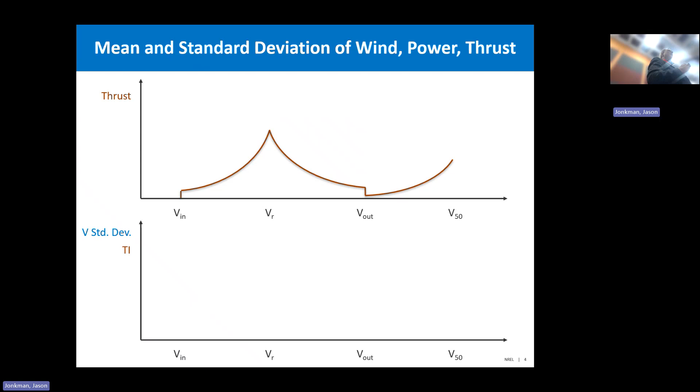So my question next is, thrust is going down. Why do we have to shut down the turbine at high winds? Just let it ride through. Thrust is actually lower. So why do we actually shut down? What's driving that? Anyone? Why shut down on high winds? Any idea why you do that? Yeah, please.

Yeah, it's all about stochastics. It's all about turbulence. And so maybe my next question is, if you look at standard deviation of the wind speed, so fatigue is really what's driving the shutdown, or turbulence intensity, what do those curves look like? If I go to higher wind speeds, is my standard deviation going up or going down? Is my TI going up or going down? At least at a typical site. What do those look like? Any ideas? And if you've downloaded the slides, you probably already see it.

But let's look at standard deviation. Is that going to go up or down with mean wind speed? Please. Perfect. I completely agree with that answer. So this is at least how the IEC will say the typical site goes. The standard deviation of your wind speed is going to go up, and your TI is going to go down, because the TI is the standard deviation divided by the wind speed, and the denominator is going up a little bit faster. And so this is really what's driving it.

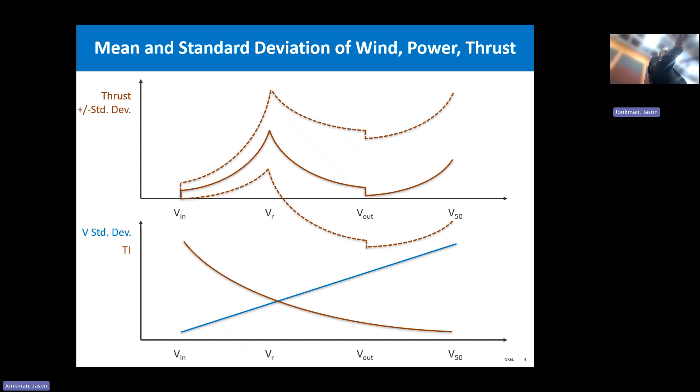If you look at the range, basically add the standard deviation to that load, it looks something like this. Maybe it's a factor of 2 above the mean at rated. Of course, it spreads out as your standard deviation is going up. The load is going to get worse, and eventually fatigue is just going to hit you at the high wind speed. So that's why you shut down. Whether the peak of the load is at rated, cut-out, or the 50-year extreme probably depends on the turbine. I drew it the way it commonly is, but that hopefully gives you some basis of what you're expecting in the different operations of the turbine.

Okay, next fundamental concept. You have to understand this or you can't get anywhere. So, mass-spring-damper system. I have a mass M, spring K, dashpot C, and applied force F. What's the equation of motion for this system, in terms of those variables? Anyone? Equation of motion for that system?

Perfect, I think that's what you said. So I could think of this as a very simplified turbine, right? Maybe that's my tower mode, and the nacelle has big mass, they have the rotor on top, and I have some spring damper representing the tower. And so there's the equation of motion.

So now my question for this system, very simple system—I think you all studied it in undergrad—what's the difference in this system between a resonance and instability? How would I make this system in resonance, and how would I make that system unstable? First of all, resonance—what would drive that system into resonance? What does that look like? There's some characterization of that system to make a resonance. What would that be?

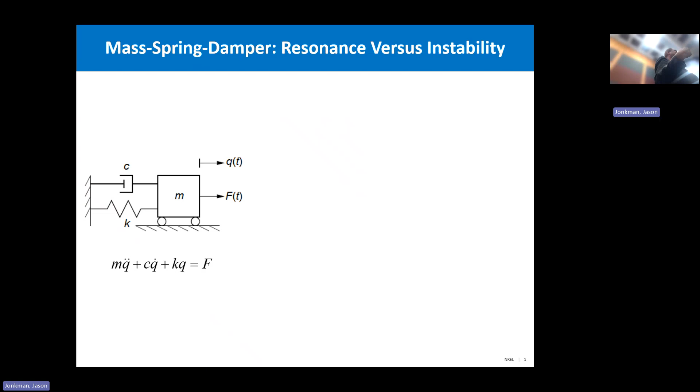I'll try again—like the force you apply. So I take my force and say that's some cosine or sine of omega. And if that omega lands right on the natural frequency, that square root of k over m you mentioned, I can get resonance. And the thing with resonance is that it basically grows linearly. It depends on damping, but it will grow linearly. So that's bad—not terrible, because hopefully you realize that and shift away, but it's bad.

Now, what would instability look like? How can I make that mass spring damper system unstable?

Yes, you change a sign. Typically it's in the damping. So great, I agree—so if I take my damping and say that's a negative value, what you really get is an exponential growth. So it's not linear anymore, now it's exponential. And eventually that's either going to destroy the system altogether, it's going to blow up, or maybe you'll hit some nonlinear limit cycle oscillation.

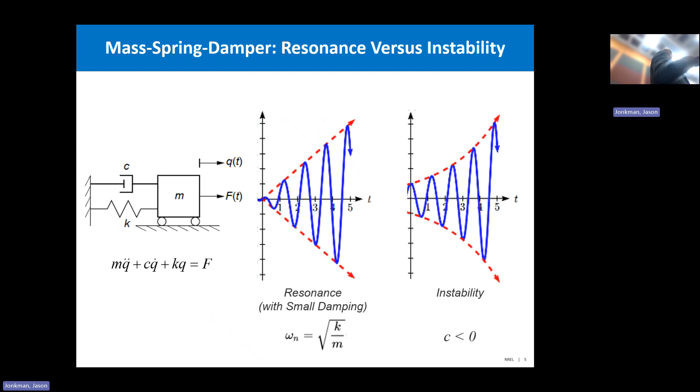But that's bad. And a big part of loads analysis for wind turbines is about this—where's my resonance, and that's usually about what frequencies of excitation are coming in. I don't want to dwell on that for long. So I want to avoid resonance, and I absolutely want to avoid instability—that's really bad. Usually instabilities happen through some aerodynamic interaction. That damping can become negative through aerodynamics, so we have to be very careful with those things.

Finally, the last fundamental concept that's really important is that resonances are bad—so how would you get resonance in a turbine? What you see is that a turbine operates in a turbulent atmosphere, and the rotor basically samples this turbulence. If you imagine just a linear shear, my blade's going to cut through that, and that blade's going to feel basically a 1-per-rev cycle because of shear.

I think of turbulence like a Fourier series—I have the linear term, the quadratic term, the cubic term, and so on. It's really kind of sampling that nasty field, and what that does is sample the turbulence. So the blade is going to see excitation at 1p, 2p, 3p, and so on, all the harmonics of the RPM. Of course the energy in that wind decays with frequency, so the lower frequencies may be higher than the higher frequencies, but nevertheless, it's going to sample that.

If you take that 3-bladed rotor and put it on a tower, you're going to see something very different in the tower, the drivetrain, the nacelle. You're going to see basically a sampling of 3p, 6p, 9p, because it's feeling the effect of the rotor. So these are the frequencies that are extremely important for the blades and the support structure.

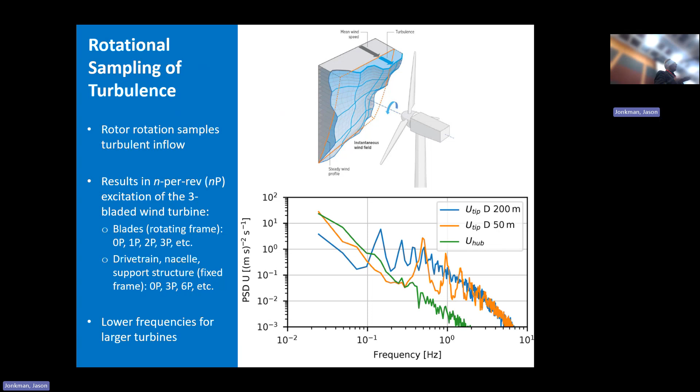So any questions on that? That's sort of fundamental concepts, and we'll use them all, I think, throughout the day—but fundamental things. Any questions on that? Makes sense, hopefully it's not too new.

Okay, you want to say something? I was just going to say, in your case, the force was only a function of time, right? Was it also a function of Q and Q dots? Yes, with instability, yes definitely—the force comes from the wind, it can be unstable as well. Yeah, so very much that's true in the aeroelastic sense, right? Because the aerodynamic force is not just a function of time; it's going to depend on the motion, both displacement and velocity, maybe even acceleration. So it's all there—great point.

So there's some fundamentals of that you need to understand for wind. Next thing, design principles of wind—maybe just jump through this here. So really, I think it's this coupling that really drives loads analysis for wind turbines.

So of course, we got the aerodynamic load that hits the rotor. As Emmanuel was saying, it's an interactive effect between the rotor and the wind. There's structural analysis, since these things are large and flexible. Most of these systems now are the size of buildings, skyscrapers. So there's lots of modes that can get excited, and natural frequencies, not just one. In mass spring damper systems, there's a range of natural frequencies, and you always have to worry about resonance of those things.

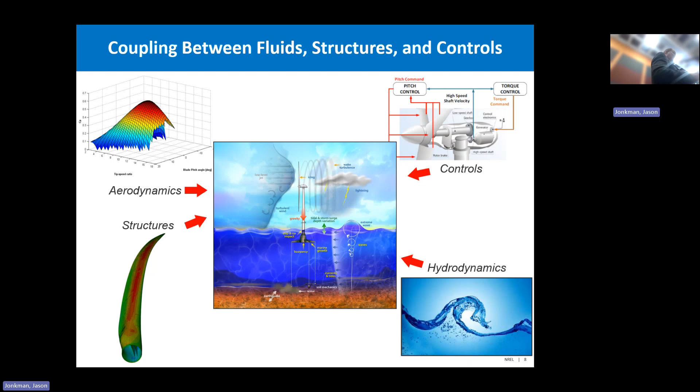First, there's a control system there. So there's basically a brain in that turbine reacting to its environment, making decisions based on sensors and doing actuation. Then, of course, the hydrodynamics for offshore systems. We'll talk a bit about all those things.

So structural loading is sort of key to design. If you want to know how the process is laid out, it's really spelled out by things like IEC design standards. This lays out the IEC, like 61400-1 for land-based, -2 for distributed wind, and -3 for fixed and floating. What they do is lay out a series of load cases that you have to run. So you basically take OpenFAST, you never just run it once, you always run it through a range of conditions, say between the cut-in and cut-out wind speed, to see what it's going to do for all the conditions that we see.

In addition to normal operation, there's a bunch of fault cases. So the turbine loses the grid or something, or the blade doesn't react to its control system. There's faults that could drive loading, so we have to run those cases. There's startup and shutdown events, and of course during extreme storm conditions, you typically park or idle and try to ride through the storm. Those things can also have faults. So the IEC basically lays out what these load cases have to be.

And that's what you're trying to do with OpenFAST, really aiming for two things. One is, what's the 50-year extreme load that my turbine will ever see, and I design for that. The other thing is fatigue life. Normally designed for say 20 years, maybe 30 years, but you're trying to track all the fatigue cycles over its lifetime. Tools like OpenFAST are fundamental to that.

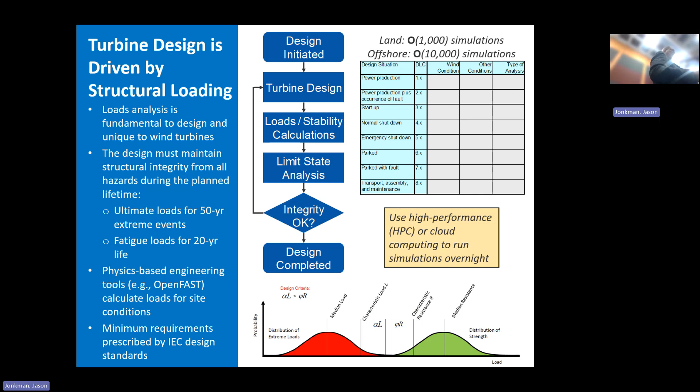In terms of response, the ultimate loads aren't necessarily driven by the highest wind. It could be, but it doesn't have to be - maybe it's some gust that drives your ultimate load, the highest load your turbine will ever see. So be careful about that. For fatigue, it's really about trying to track cycles over all the lifetime, all the conditions it can operate in.

And then the two things we also mentioned: resonance - you want to avoid it, at least mitigate it as much as possible. Your turbine has variable speed, so it is going to go through resonance at certain points in its life, but you don't want to dwell on that for too long. And of course, instability - you want to avoid that at all costs. You don't want the model to be unstable. These are all key things in response.

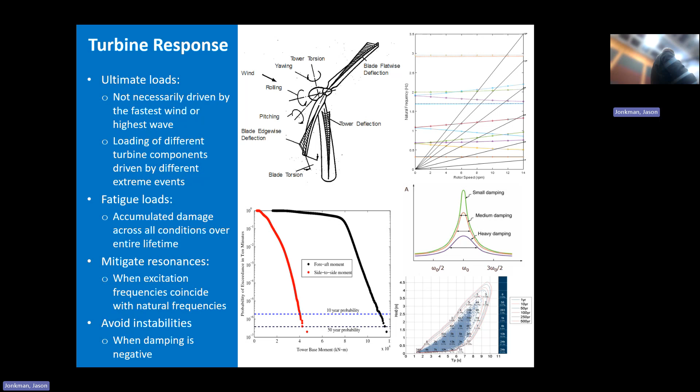If you were here at the previous thing by Misha, he showed various ways of showing the NREL tools, and this is just my way of sharing that. This shows fidelity across the columns, and single turbine versus full wind farm as the rows. OpenFAST sits in the middle. That's what we're mostly going to be talking about today.

If you're curious about the rest of the tools NREL has, we have low fidelity models. WISDEM has a set of low fidelity, quasi-static or frequency domain type models that can do a turbine, but at much lower fidelity. And of course you can move to very high fidelity, usually on the aero or hydro side - if you want to replace your engineering model with a CFD type solution, you move to something like SOWFA or ExaWind.

Likewise, for the full plant, there's a FLORIS workshop happening right now - that's basically steady state aerodynamic performance of a wind farm. If you want to look at the dynamics of the wind farm, you use FAST.Farm or WindSE, and I'll talk a bit about Fast Farm today, not too much - we should really have a separate workshop on that. And of course, you can use high fidelity in that space as well.

I like to say these tools are very interactive. I've used a lot of high fidelity to inform the engineering models - either you're validating or calibrating something from a high fidelity simulation. So you're almost never running just high fidelity; you're usually doing it in conjunction, say, with OpenFAST. Sometimes we do that to calibrate and improve the model.

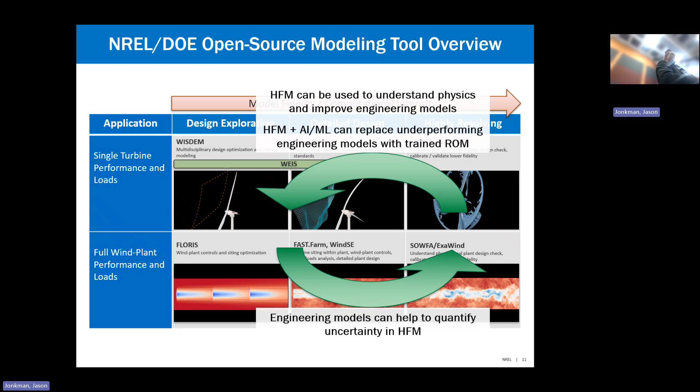I think the other way, it's also complementary. Usually with high fidelity, you can only run a few simulations for a given project - the most I've ever run in a given project is 10, whereas with OpenFAST you run 100,000s of times. So there's also complementary value where we can quantify uncertainty with engineering models that you can't really do on the high fidelity side.

So they're very complementary activities, but today we're going to focus on OpenFAST, and the connections will hopefully become clear as you go forward.

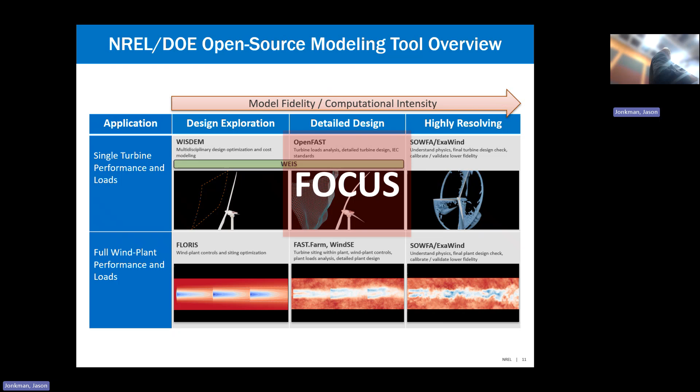In terms of how these tools are used, because it's an engineering model, we're not resolving everything directly. There's obviously fundamental theory, like F equals MA, but we've made some fine assumptions at some points - we're not fully resolving Navier-Stokes equations, say for fluids. The engineering model is also based on whatever technology you're focused on. So if you have some new, say, partial span pitch design, you want to look at that and design around it, you have to bring the physics of that system into OpenFAST.

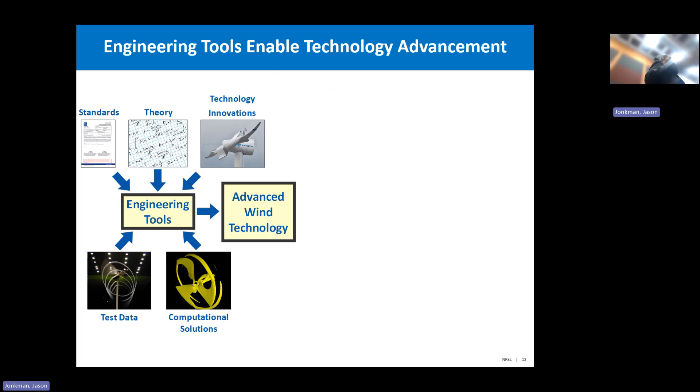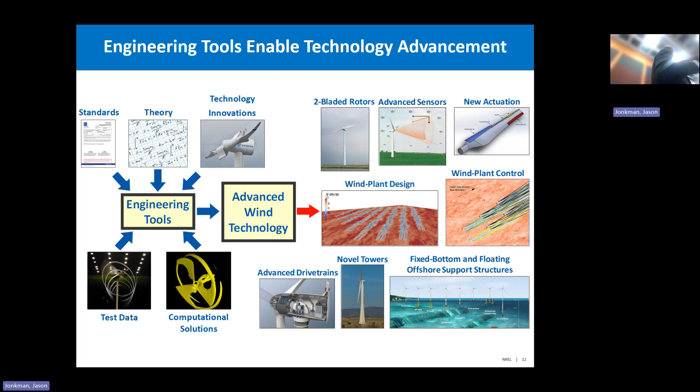A lot of OpenFAST development is targeting that, things we haven't done yet. As I mentioned, using a lot of computational solutions or experimental measurements to validate or calibrate your model is important. Once you have the model built, the applications are endless - designing new turbines, how new sensors will interact with the system, looking not just at the turbine level but at the farm level, how things interact with the farm, and all the offshore structures and new technologies coming down the pipeline. Hopefully that's a broad brush of where the tools are used.

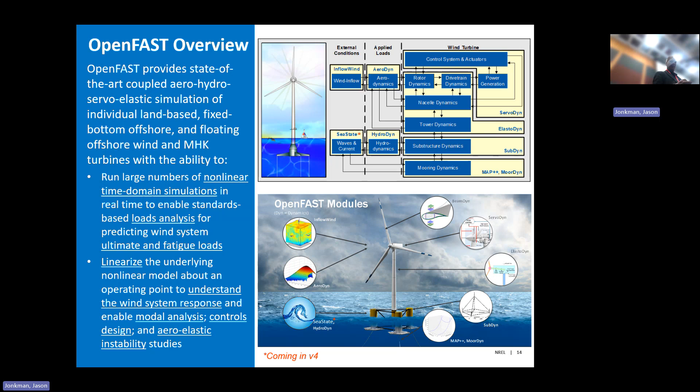I know I've already been asked, is this going to focus on FAST.Farm? We really should have a separate workshop on that. My hope is that if you can understand all these principles of OpenFAST, FAST.Farm is just one step above that. I think the hardest part about FAST.Farm is setting it up - the model is a little harder to set up. But if you can understand the concept of OpenFAST and know how to run that, you can learn how to do FAST.Farm. It's just one step in complexity, and there's a lot of Python scripts that allow us to run that well. But if you don't know what any of that is, what happened there?

Basically, we have each wind turbine in your wind farm as an OpenFAST model. This wind farm has 36 turbines, and I can show that animation. This is actually a FAST.Farm simulation, not large eddy simulation. There are 36 turbines of this King Plains wind farm, and each one of those turbines is an OpenFAST model doing its thing.

Basically what FAST.Farm does is it does all the wake part of that calculation. Of course, OpenFAST will calculate the wake of an individual turbine. FAST.Farm will track that wake as it goes downstream and make sure it interacts with all the other wakes in the wind farm, so that wakes in one turbine can hit the next turbine and have that interaction. That's what we're trying to do in FAST.Farm.

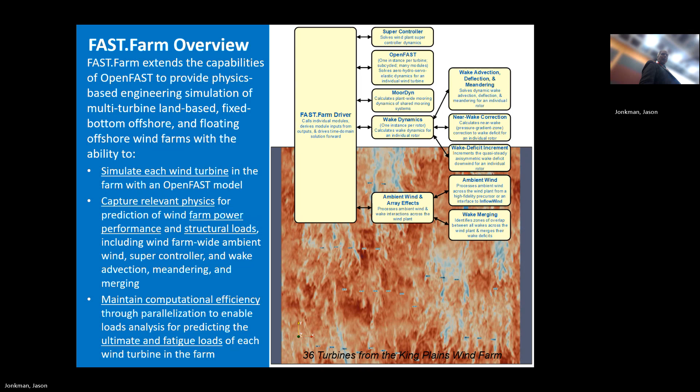Okay, so let's see, this mostly lists all the modules. We won't talk about every single module today, but we'll talk about a lot of them.

Some of these are coming in version 4.0. We'll talk about the main things for wind turbines: ElastoDyn, BeamDyn, AeroDyn, InflowWind, ServoDyn. A lot of the modules, probably half of them, are for offshore things: hydrodynamics, sea state, structural dynamics, the mooring system of a floating system, plus modules for ice loading and so on.

In terms of new things coming down the pipeline, there's a simplified ElastoDyn. The idea is, if I'm running 100 turbines in FAST.Farm and only care about loads on a few of them, I still want to represent the wakes of each one. Simplified ElastoDyn does that for me and makes that part go really fast.

Same thing with AeroDisk. I don't want to solve the whole BEM, I just want to say here's a thrust curve on that turbine. That's what AeroDisk is for — it's really for making FAST.Farm better.

SoilDyn is coming in 4.0, allowing full soil-structure interaction capability through things like p-y curves or stiffness and damping matrices. And as mentioned, SeaState has been extracted out of OpenFAST and separated into its own module.

Very modular. We'll talk a lot about modularization. It's open source and freely available, but we're trying to make it more interactive, where it's not just NREL or UMass giving code improvements out. We want to say, if you have great ideas from your PhD project, postdoc, or company, we're willing to accept your contribution to the OpenFAST community, and we've laid out a process on GitHub.

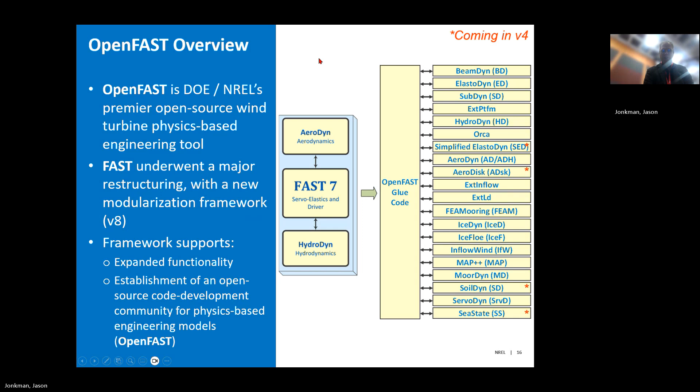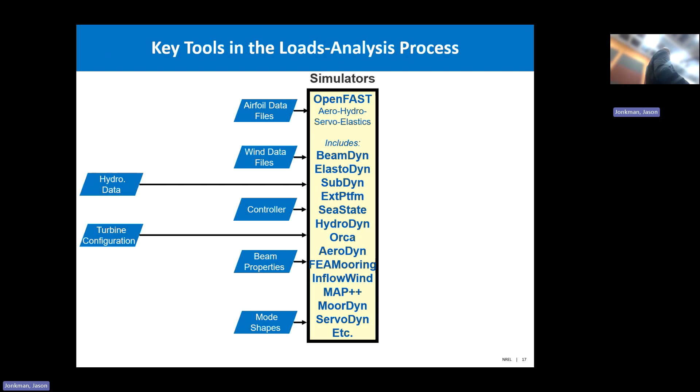Now, in terms of the process, OpenFAST sits in the middle of a bigger process. Normally there are lots of inputs you need to define to run OpenFAST. One big input is airfoil data — lift and drag versus angle of attack.

Usually you have some sort of 2D airfoil data set, say from a wind tunnel or XFOIL. We have a tool called AirfoilPrep that takes that 2D data and does rotational augmentation to give you the 3D coefficients, or the full angle of attack range needed for OpenFAST. That's usually a pre-process we use to generate airfoil data — sometimes we just give it to you, and if we generate a new model from scratch, that's the process used.

Another big input to OpenFAST is the inflow you're going to run — whether steady conditions, or full field turbulence with gusts, spectra, coherence, and so on. You usually use a tool: TurbSim is the one NREL provides. If you want to use the Mann model instead, DTU has a free open source code called the IEC Turbulence Simulator, which basically does the same thing as TurbSim but with the Mann model. Either way, you can use that inside of OpenFAST.

In terms of the controller, that's less of a controls expert topic — the controller may be the hardest part of the aeroelastic solve. NREL is trying to make it easier through ROSCO. With a few basic setup parameters, you can get a solid baseline controller for a new turbine. We provide ROSCO controllers for all our reference models, but if you have a new turbine, you can always start with ROSCO. Usually industry has controllers one step above ROSCO — they never tell us what they are, since that's the secret sauce in the industry — but nevertheless ROSCO is a solid baseline to begin.

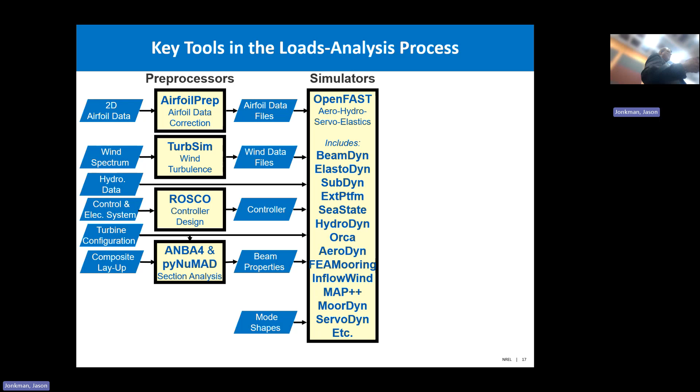Another big input is the beam property. OpenFAST, BeamDyn, ElastoDyn, or SubDyn will treat structural members as beams, not as solids or shells in the elastic solve. So how do you get the beam properties? If it's metal and a circle, I can calculate that analytically. But if it's a composite cross section, what is the effective beam of that? We have tools like ANBA4 or pyNuMAD that are pre-processing engines that look at the composite layup and generate the beam properties for you.

Another input, if you're running ElastoDyn, is you need mode shapes as input. We'll talk about why that is, but two codes shown there for mode shapes: one is BModes, that's an NREL tool. The other is Frame3DD, not an NREL tool, but we developed a Python wrapper for that, making the modal analysis easy, to give you inputs into OpenFAST.

In terms of post-processing, and Emmanuel will cover this more, there are several sets of outputs from OpenFAST. Of course, one is the time domain response, and PyDatView is probably my favorite tool for that. Emmanuel will talk about that a lot. There's some historical tools as well that can do basically batch processing of output data.

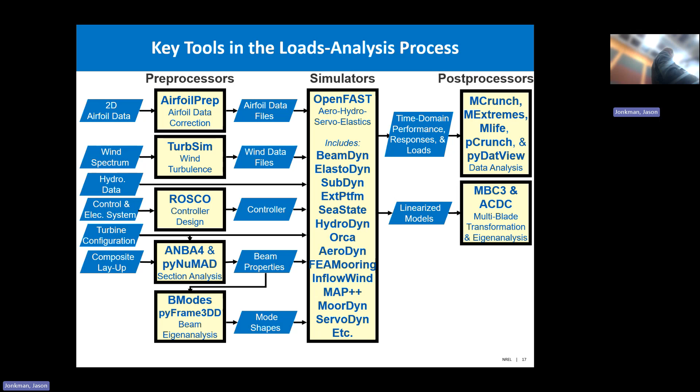Another output is linearized models. OpenFAST can basically generate the ABCD state space matrix of your system. What do you do with that? There's two tools we often use. One is the multi-blade coordinate transformation tool that can do things like mode shape identification and so on. We've developed a new GUI called ACDC, which Emmanuel will talk about as well. It's really useful to automate the process of generating Campbell diagrams and does all that for you, generating mode shapes, natural frequencies, and damping ratios.

Another thing you may want to do is just visualize the output, animate the response. Usually what we do with OpenFAST is output what's called VTK files, a very open source file format for visualization. ParaView is a nice free open source tool, not an NREL product but we use a lot. You can import these VTK files into ParaView and animate the response, look at the mode shapes, the time domain simulation, or just your configuration. So OpenFAST doesn't have a GUI, but these are ways to get that out of it.

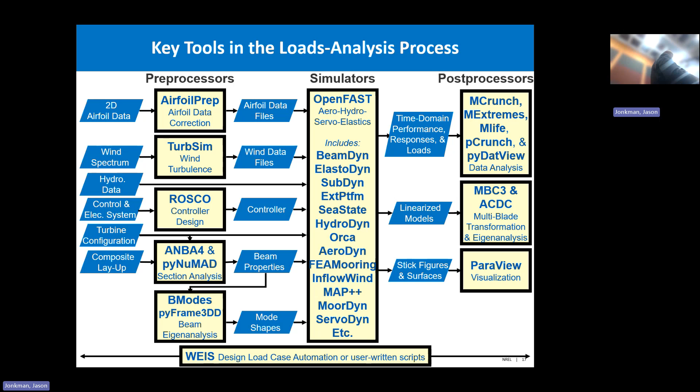Finally, you're never running OpenFAST once unless you're just trying things out. You're running it hundreds of thousands of times. So right now we're focusing all our loads analysis type work into WEIS, and we're actually planning a workshop for WEIS at next year's NAWEA, so there's a lot more information coming on that. It really automates this whole IEC load case process. A lot of people, more expert OpenFAST users, have written their own scripts, either Python or MATLAB, to do that as well, but WEIS is Python based.

A big part of our work at NREL is not just developing the tools, but ensuring we have some sort of envelope of understanding of where this tool works well and where it doesn't. Verification and validation is a key part of our activity. Verification means comparing OpenFAST to some other code trying to do something similar, or some well-established benchmark problem. Validation means comparing to a really high fidelity solution from large eddy simulation or maybe some experimental data. To me, it's this combination of those things that really is driving technology forward, never just doing it by running high fidelity models, but combining that with an OpenFAST model.

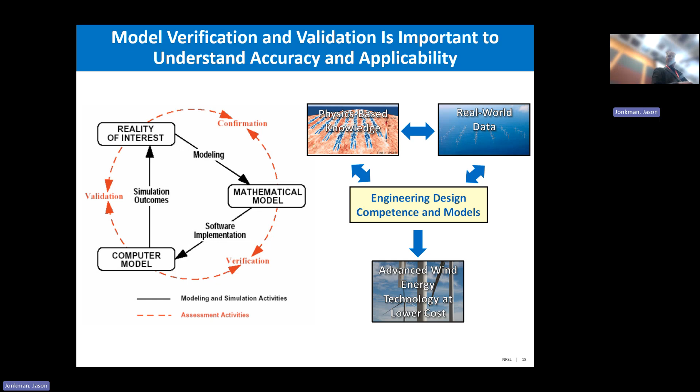Okay, I'll pause there again. Now we'll start diving right into the details of OpenFAST. Any sort of high level questions before we get into that?

Still a quiet room? Please.

It was removed. That was added back in, I don't know, it was version 3.4 or 3.5, but it is available now. If you have a SubDyn model, it definitely is visualizable in ParaView. Yeah, thank you. It was broken for a bit, but it is fixed.

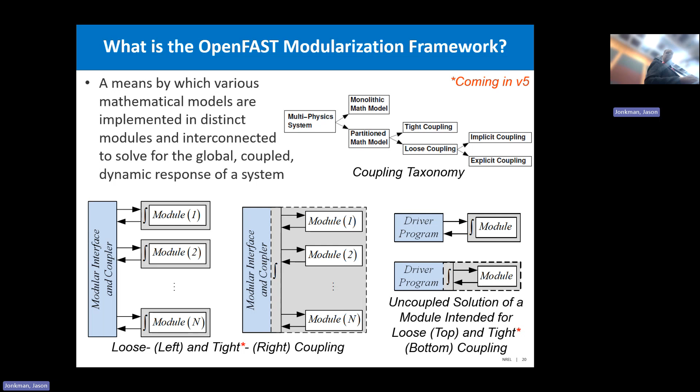Now how is this framework set up? Think of the modularization framework as blocks where I have the module itself, and inside that module I have the states of the module - what determines what state the model is in - and the parameters, which are the constants of the model. My module is really driven by inputs.

So how is that module being informed by something else outside of it? And the outputs, of course, are what my module is sharing that other modules may want. Usually these are the variables we tend to use: the inputs we call U. The states are usually three or four different things - think of it like a continuous time state, that's what we call X.

So usually that means there's some X dot, the derivative of that. XD is like a discrete time version of that, so X at n plus 1 equals some function of X at n. Z is a constraint algebraic state - it's needed, but there's not a differential equation that drives it. P, of course, is my parameter. Y is what I'm showing as my output.

So here's a typical form of a module. Again, it could be either some continuous time differential equation, or it could be a discrete time update.

Constraints are usually written as some algebraic constraint, 0 equals some function z, where I'm trying to use that to solve for the little z. And the output is usually just an algebraic thing. So given my states and my input, I can figure out what my output is. So that's an algebraic one.

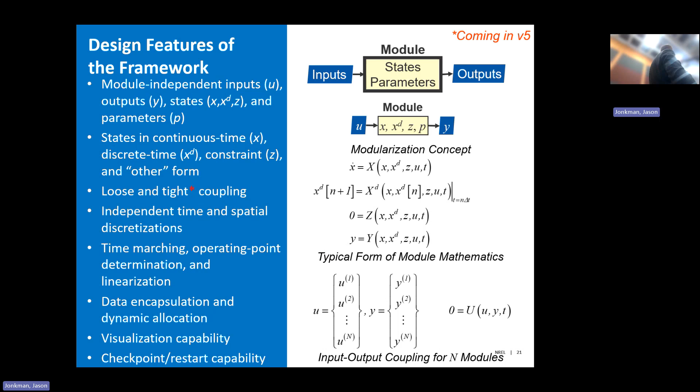So for a loose coupling, basically the module will get its inputs, solve for X, the big X there, and the big XD and the constraints, and advance this from one step to the next. If I'm ever calling the calc output routine to calculate outputs, it is really solving the algebraic equation. Now, these are just features of the framework, and we'll talk a bit about what each one of those is.

So first of all, a little background on what inputs and outputs are, with typical examples you'll see in OpenFAST. For aero, usually my control volume is around the aerodynamics. My structure is not in my control volume, but obviously I want to know what the aerodynamic load on that structure is. So my output will be the aerodynamic load to that structure. Usually the input, as Manuel was saying, is that I can't calculate the aerodynamic force unless I know what the structure is doing. So its motion, displacement, velocity, and acceleration are inputs into that aerodynamic model.

Inside that module, it's using lots of things to calculate the outputs. Usually we talk about blade element momentum theory as an algebraic system. It's a nasty algebraic system, but it's effectively what we call a constraint in this framework. We have to solve for the induced velocity or the inflow angle with some algebraic constraint. There are also generalized dynamic wake models, what we call dynamic BEM, where you pass that BEM solution through a time filter, and that introduces continuous time states in the model. We also have the HGM unsteady aero model that's based on a continuous state formulation.

The classic Beddoes-Leishman unsteady aero model is written in discrete time, which is easy to time integrate but not too useful for linearization purposes. So we have that option in there. Then, of course, the parameters of the aerodynamic model are your geometry, your airfoil data, and your inflow. Hydro is very similar. The output would be the hydrodynamic load, and the input would be the structural motion. Internally there could be states, usually associated with the convolution term, which we'll talk about briefly. And then the geometry and the coefficients of the model are the parameters.

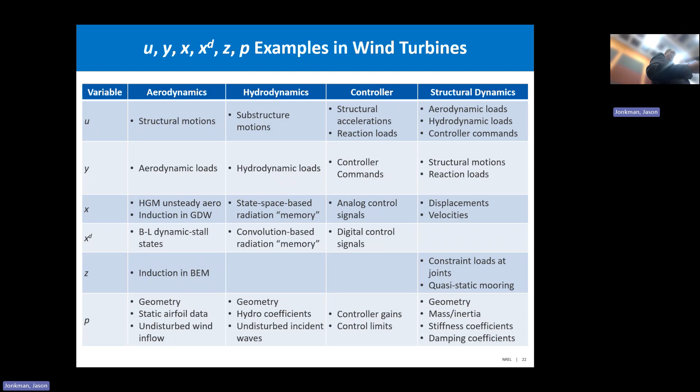For the controller, its output would be what it's commanding: here's what the blade pitch is going to do, here's the torque, here's the yaw signal. And of course, it's getting reaction loads or motions as input. Internally, it may have analog states and discrete states, and the gains and limits are the control parameters. For the structural dynamics, F equals ma is basically what it's trying to solve. The states of that model are displacements and velocities. The inputs are the aerodynamic load, the hydrodynamic load, and control commands, and it outputs everything the other modules need: reaction loads and motions. The parameters are mass, stiffness, damping, geometry, and so on. So hopefully that gives you a sense of what these things look like, and we'll also talk about those as we go forward.

Coupling dilemma: all these modules interact together. Instead of making spaghetti code where all these modules have things going each way, we try to streamline all that and say each module is in a column, driven by one driver that handles all these arrows. The glue code is basically handling all the interactions. It says that input has to connect to that output, that output has to connect to this input, and so on. And all those algebraic equations that define that coupling are in this glue code.

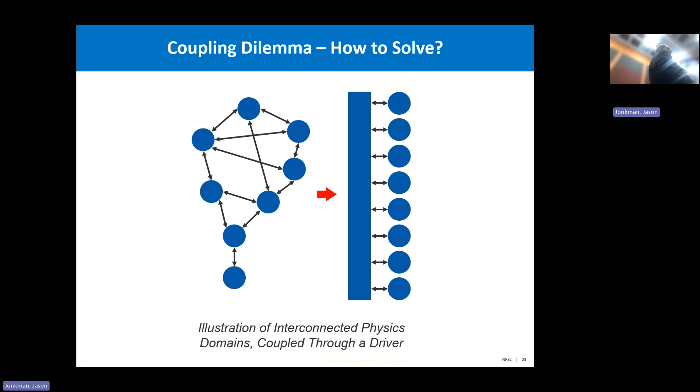So how does our glue code work? Again, explaining what we mean by loose and implicit. Currently OpenFAST uses this implicit loose coupling scheme. By loose, we mean every module in OpenFAST has its own solver trying to advance its time step from one to the next. By implicit, we mean there's a global predictor-corrector scheme on the outside, making sure it's converged.

But input-output coupling, so every module has an output and it's sending its output to another module. Some of the module couplings are explicit, meaning the output basically just goes directly as input to something else. Some are implicit, meaning I can't calculate that output until I know my input, and I can't calculate my input until I know my output.

So I have some algebraic system I have to solve. This often happens in, say, hydrodynamics. The classic example is added mass effect. I can't calculate my hydrodynamic force, my added mass hydrodynamic force, unless I know my acceleration. And I can't calculate my acceleration until I know my force, right? And so I have this implicit connection.

And OpenFAST will solve that, even in the loose coupling sense. Later on, I'll explain which modules are implicit, which are explicit, but that's sort of key to its solve. Again, the current implicit loose coupling scheme is numerically stable, but sometimes requires a smaller than desired time step, particularly if you have BeamDyn on. And that's what we're fixing in this new tight coupling solver coming in 5.0.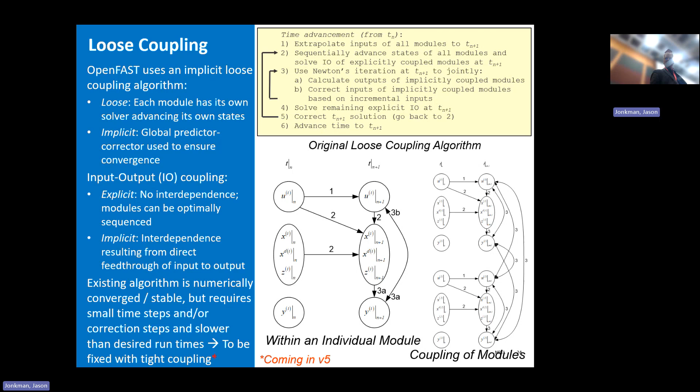Big part of the input-output coupling is a spatial mesh-to-mesh mapping. For example, this is showing, say, a hydrodynamic mesh where I have my spar and I have a bunch of beam elements, say, to represent that spar structurally. Hydrodynamically, I have my hydrodynamic force, but it's distributed. The mesh mapping allows us to couple those things together, even it's not just one point now, it's a full, say, line mesh of interactions.

And so every module that has this sort of spatial boundary to it, we've set up a mesh data structure. And that mesh consists of basically three things. There's, what are my elements of that mesh? If it's rigid bodies or point forces, it could be a point mesh. If it's like a line, like a beam element, or distributed force per unit length, that would be a line element.

So every node or element basically has some sort of reference, position, orientation, say, of that reference. Position also has fields on it. So what are my inputs and my outputs on that mesh? So that could be, that point has motion, position, velocity, acceleration, say. Maybe that point has forces on it. Maybe it's some other scalar quantity like temperature or something. I'm not sure. But every mesh sort of has this sort of set of what we call fields. Really the inputs or outputs that fit on that mesh.

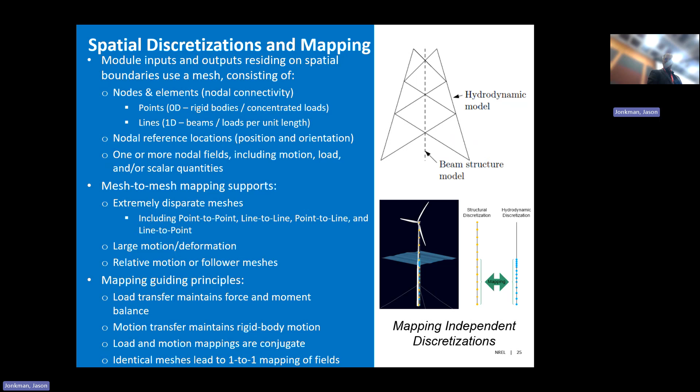Hopefully that's clear. This is showing one example - I wanted to make an animation but it might not work, so I kept it this one. Just picture it as two different modules. Module one, in the middle column, is the structural model - it's saying I want to input aerodynamic loads and I'll give you motions back, and it's just a point. So I've taken my whole blade and I'll just say it's one point.

That's rigid. Aerodynamically, I've distributed that aerodynamic load across the blade, say in 5 points, and I want to know motion of those 5 points, and I'll give you loads back of those 5 points. So that's the idea.

So the way this mesh mapping will work - say my structural model displaces 2 meters in X and it rotates a bit. There's the motion mapping that will take all those 5 points and translate them 2 meters, then rotate the whole thing as a rigid body, like the blade is spinning. That's what the aerodynamic module will see - not just a single point, it will see all 5 points moving.

Now the aerodynamic model will do its thing and calculate some force distribution across that blade. Then it needs to get passed back to the structure, so it basically integrates those forces up, and the total force of the blade will be the integration of all that. Because some of these nodes were offset from the one point I do have, that distribution will also create a big moment, shown in red. So the mesh mapping basically supports that sort of interaction. Again, if you do disparate meshes, that's what's going on in the background of OpenFAST.

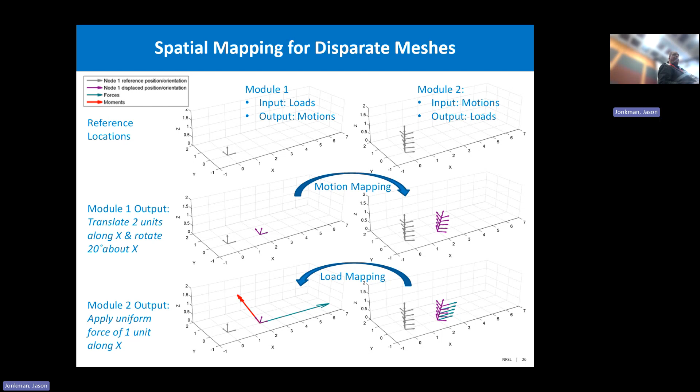Self-explanatory. Now linearization. Again, really what you look at in the module, there's nonlinear equations of motion, say for constraints. I'm showing a simple example there with no discrete time states. But that's my system, say a module has.

Really the linearization is basically you say, I have some operating point I want to perturb about. So say there's my input with the UOP, that's my operating point input. I also have an operating point for my states and my output, but basically linearization is some perturbation relative to that operating point.

And I can basically take that nonlinear system shown on the top and represent it as an ABCD state space model, where the A, B, C and D are all basically Jacobians of the states, constraints, and inputs relative to the states, constraints, inputs. So I'm showing what the A matrix would look like there. If you have no constraints, it's just the derivative of that big function X with respect to the state, that's what A would be. If you do have constraints, there's a little algebraic manipulation to eliminate that constraint. Once it's linearized, constraints are really easy to remove because they're linear. So that's showing what A would look like in that case.

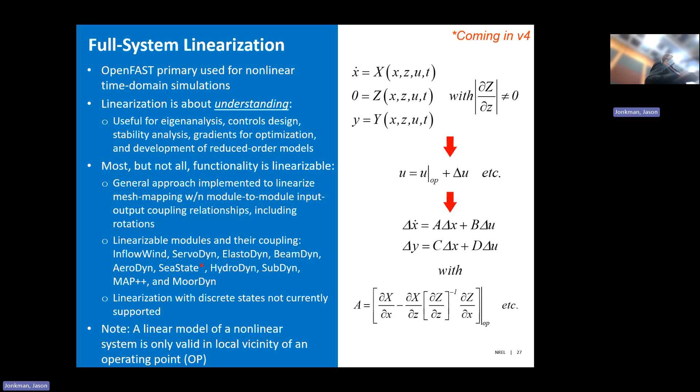Really powerful. And the key with linearization, of course, is the model underlying is non-linear. So this linear model is only valid for small perturbations about that operating point. If you linearize the model at 8 meters a second, it's probably not very valid at 18 meters a second, models look so different at that point. I think the hardest part for people to understand with these linear models is, well, why can't I use it everywhere? It's because it only works for perturbation, since the underlying model is non-linear. So what do we do?

So every module, all 7 of those, has its sort of state space representation as an example. OpenFAST can generate those things at the module level. Glue code also sets up its based linear system. So the glue code linearization is fully analytical and automated, and it represents coupling between the inputs and outputs that it sets. And so that's done linearization.

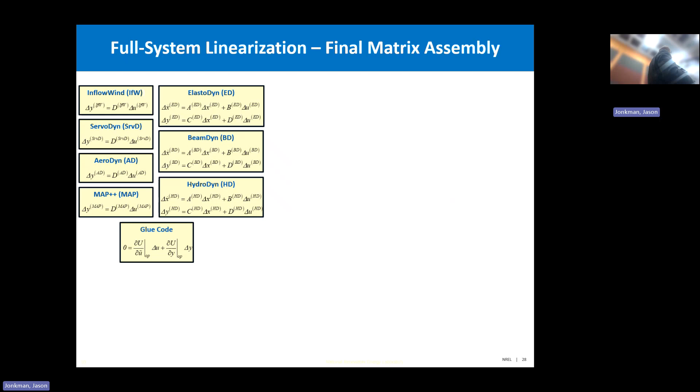Once I know all that, it's basically some algebraic manipulation to combine it all together. And so I can then represent the global system ABCD state space model in terms of the full system now. So a couple of things to point out there: the D matrix, if you're familiar with state space, really highlights all this coupling, including the role of direct feed through from one module to the next.

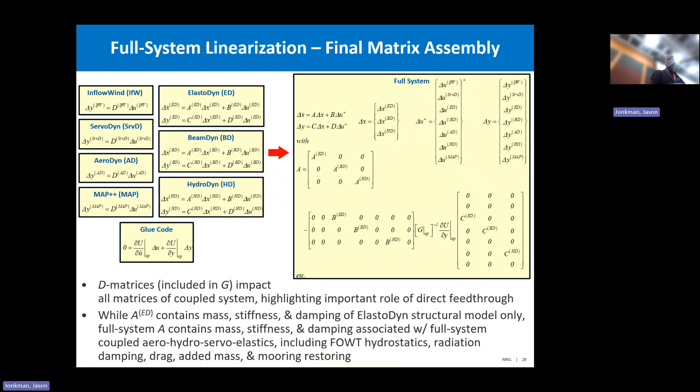And say for ElastoDyn, ElastoDyn will have the mass, stiffness, and damping of just the ElastoDyn model. But the full system version of A will not just have the structural information, it will also have the full aerodynamic interaction. So now my damping will have the aerodynamic damping built in. As Manuel said, that can also lead to instabilities if you're not careful, if you're not good on your design. Aerodynamic stiffness would be in the matrix, and the full system has that full effect in it. So a nice thing about linearization is you can look at it in an individual module's linearized form if you just want to understand what that module is doing, or you can look at the coupled interaction through a state space formulation. So really powerful capability we're able to keep with our linearization framework.

Just showing how that looks in terms of the inputs. I think maybe one thing that confuses people a lot: on the left is basically the nonlinear time domain solution. Again, I have these big functions, my continuous time differential equations, constraint equations, output equations. Every module has their own set with a big set of algebraic coupling equations U there. In the time domain, you're basically doing the interaction, giving input, solve for output. In the linear sense, basically, we do a perturbation in every input option.

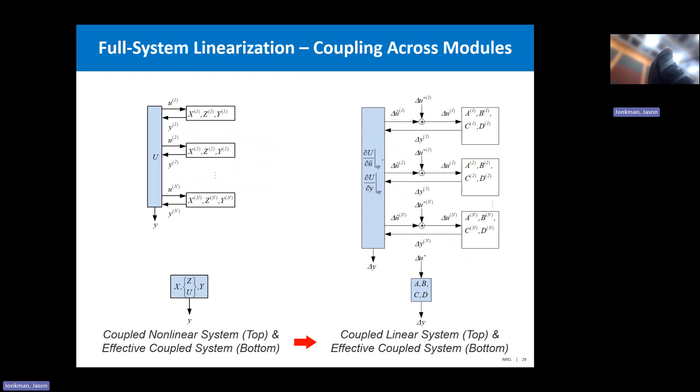So what we call this U plus delta U plus, that's like I can perturb any sort of input in my model, and then the state space model looks like that. So what does that perturbation input look like as a perturbation of an output? Just trying to paint the picture of what that linearization looks like.

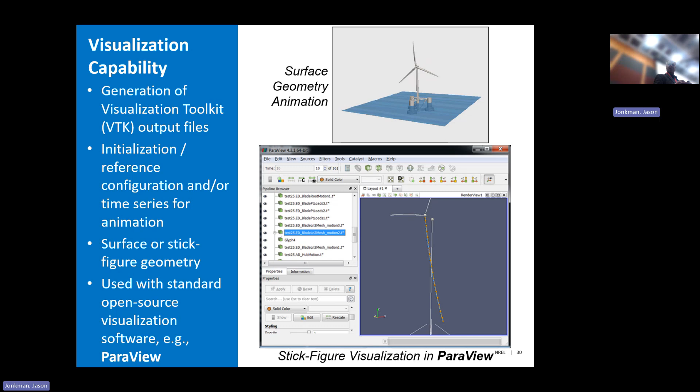A couple of final things in the visual in terms of what the modularization framework does. One is generation of VTK files. You can output a stick figure representation or a full surface geometry representation, and you can use ParaView to look at that. So in OpenFAST, you basically just output - you say, well, what do you want to output? Stick figure or full system? Do you want to do it at every time step, or just want to know what the initial configuration looks like? You generate VTK files, then port that into ParaView to visualize.

Another capability of OpenFAST is checkpoint restart. That just means basically at any point in time, it can dump all its data to a checkpoint file, and then you can restart from that checkpoint time in the future. That's usually not that important if you're just running OpenFAST by itself, but if you're coupling to say large eddy simulation, where those simulations may take a week, if you have a hiccup on your computer or lose power, checkpoint allows you to start where you left off. So not too useful just for OpenFAST, but really useful for coupled LES simulations.

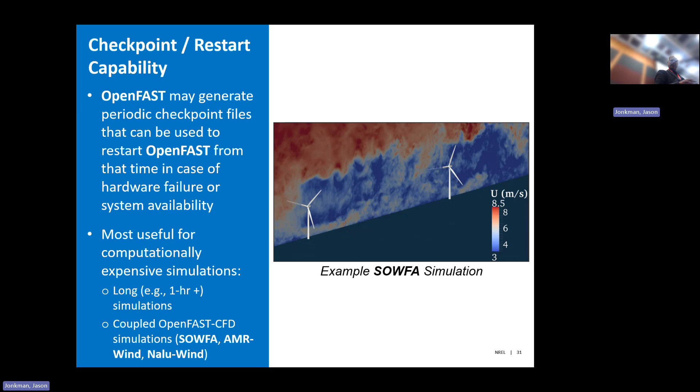And then finally, from this section, open source, we have this Apache 2.0 license. This basically just indemnifies NREL - so if you run OpenFAST and it doesn't work or you get the wrong answer, you can't sue us for that. You use it at your own risk. It's also completely free in the sense that if you want to take OpenFAST and change something and give it away yourself, that's open for that too. If you're familiar with open source licenses, GPL is the other popular one. GPL is much more like if you make your code GPL, it propagates - everything becomes GPL. Apache is like, do whatever you want with it, you just can't blame us if something goes wrong. People have used this to their advantage - a lot of commercial codes take pieces of OpenFAST and resell it as a package. Our Apache license allows them to do that.

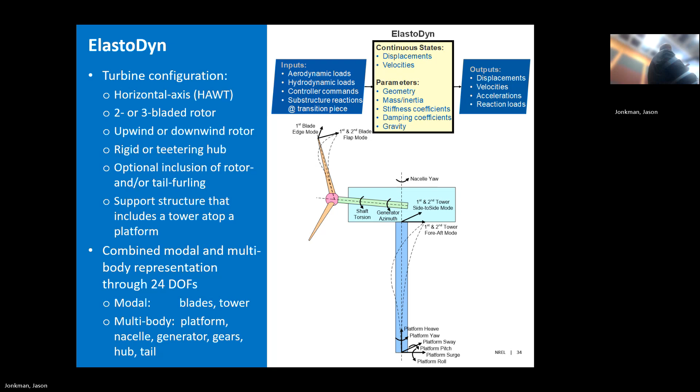Outputs are the motions and loads coming out. So a little bit more information.

It uses a relative degree of freedom sense. So if you imagine, first thing we do is we move the floating platform with 6 degree of freedom motion. Tower deflection is basically relative to that. So if I pitched 10 degrees, my tower deflection would be relative to that.

Blade and tower deflections use some small angle approximations in them, showing what that looks like. We do have this, what we call correction for orthogonality. So if I have a combination, say a flap and an edge.

In a linear sense, that's what the transformation will look like between global and local. Cosine becomes 1, sine becomes theta. So that's what a linear version looks like.

We actually take it one step beyond that. We basically say what's the closest orthogonal matrix to that, and that's the equation we use in OpenFAST. So whereas small angles maybe get you to 5 degrees, this gets you maybe to 20 degrees before it blows up and still loses lots of accuracy. But that's what's in there for the blades and the towers.

You have to be careful. You can't go too far on deflection without that. The platform rotations used to have the same transformations, so roll, pitch, and yaw used to be that way as well, where we use that transformation.

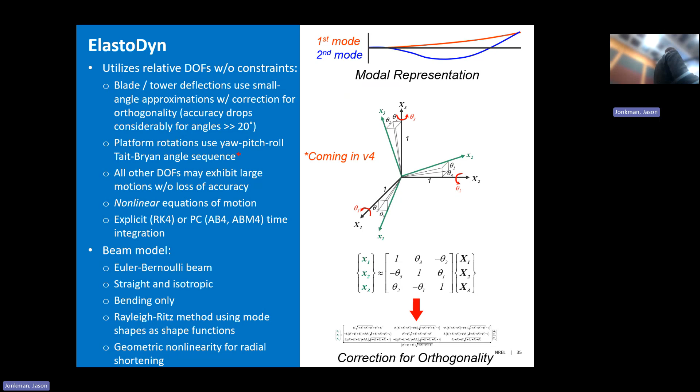That's all I have, without going into all the details. BeamDyn, if you want to take that next level, has full 6x6 mass and stiffness matrices with any coupling you want. So if you want composite coupling, say between bending and torsion, you could have that in BeamDyn. It's 6x6, so in addition to bending, it has shear, torsion, and stretching. It's all in there.

Also, the blades can be initially curved. ElastoDyn requires the blade to be initially straight, but in BeamDyn you can define a curved axis where the beam properties follow the curve, and all that coupling associated with curvature is in the solution as well.

It uses this geometrically exact beam formulation, so it's a nonlinear finite element beam model, basically the be-all end-all of beam theory. You can't go beyond that, it'd still be a beam. There's no geometric limitation in the model. Compare that to say 20 degrees for ElastoDyn beam - with this you can bend the thing in a circle, no geometrical limitation. You may start violating linear elasticity theory, but that's a different problem.

It uses the Legendre spectral finite element, meaning instead of doing H-refinement where you throw in more elements for a better solution, you keep it with one element and just say how many nodes you want, using higher order polynomials called Legendre spectral elements. So you basically do the blade with one element, and the accuracy is dictated by how many nodes you put in that element. This allows what we call exponential convergence - fewer degrees of freedom can get you a more accurate solution, whereas H-refinement requires a lot more degrees of freedom for the same level of accuracy.

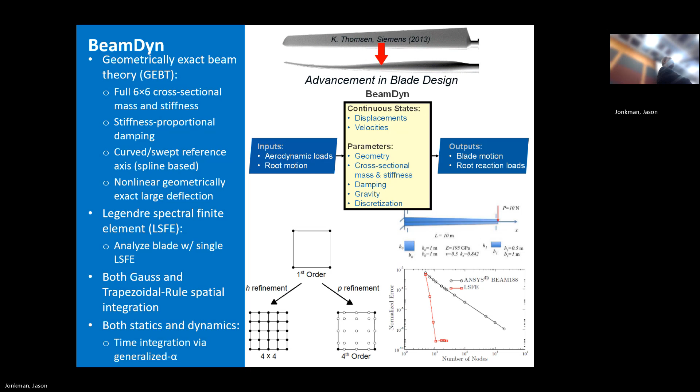AeroDyn is our aerodynamics module. There's several submodels there. One, of course, is the induction calculation. Right now there's basically 3 main options in AeroDyn for induction. One is the classic blade element momentum theory - if you study wind energy, I'm sure you know what that is. You discretize the blade into a bunch of annuluses and do a momentum balance in each annulus. We solve that balance, which is basically an algebraic constraint - it says what's the induction factor, what's the inflow angle, and based on induction, it does that solve.

The next form of that is what we call the dynamic wake model. It basically does the BEM solution but adds a time filter to it. For example, as shown in this Burton et al. paper, if you do a rapid pitch event from one state to the next, the BEM solution would just say it's 2 states and step from one to the next. In reality, what you see with measurements is that you get some overshoot and then a reaction back, so that's basically like a filter. We introduced that dynamic wake as a time filter on BEM, and that captures the effect of that overshoot and reaction back.

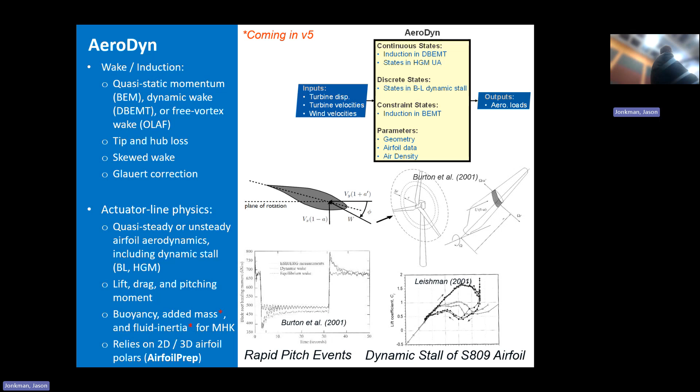But maybe one more thing there. When you run the driver of AeroDyn by itself, this is what the driver basically has to specify. For standalone drivers, you define what the inputs are that normally you would get from the coupling. So when you define the driver for AeroDyn, you say, here's what the motion of my turbine is going to do, and here's what the wind is going to be. That's what's specified in the driver to get AeroDyn to run. All of this makes sense once you see it in the modular context. So why do I have to specify that? Because that's what the inputs need to be.

One more slide on AeroDyn. Again, if you don't want BEM, you can use OLAF. That's this free vortex wake formulation. We use a hybrid lattice filament approach where in the near wake we do a full lattice, with the trailing and the shed vorticity, and you track that. At some point, you can roll that up into just a filament, basically like a tip vortex and a root vortex that extend for longer periods of time. So you can choose how you want to discretize, how much you want near wake and how much you want far wake.

Obviously, it's using the Biot-Savart law for computing the induced velocity from the vorticity. There are quite a few regularization methods in there to handle the vortex. This does have an OpenMP parallelization, because that Biot-Savart calculation and tracking all the vorticity can be fairly slow. It is OpenMP, so it's only one node. You can't do it across multiple nodes, but if you have a lot of cores, you can use that capability. The nice thing about this is it works not just for a single horizontal axis turbine, but also for multi-rotor systems and vertical axis. I won't talk about that too much today, but later this week at NAWEA, I'll talk about our new work on multi-rotor simulations, which takes advantage of OLAF's underlying capability.

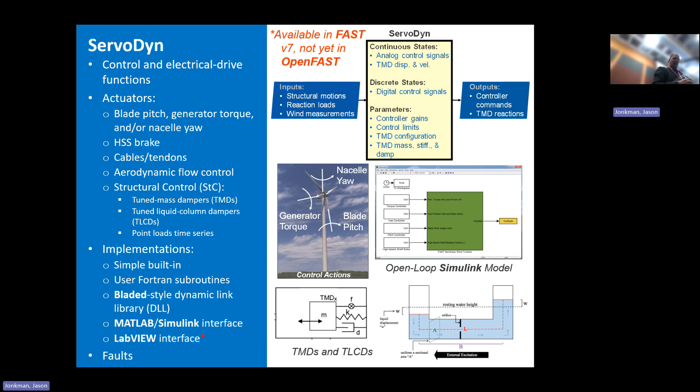That's again a pause there. Any questions on turbine capability? The next section's on offshore—probably do that after 3 o'clock. But questions on turbines? Yeah.

So the tight coupling—I think I explained it later, but tight coupling only really affects BeamDyn, ElastoDyn, and SubDyn. I haven't talked about SubDyn yet, but it takes the integration out of those modules and puts it to the glue-code level. There is some blending of that with the overall implicit glue-code coupling solve. I went through all the details last year, but it doesn't really change influence at all. There's no effect there. So all the user-defined functions, ServoDyn, wind, or customization of code will work for all that stuff.

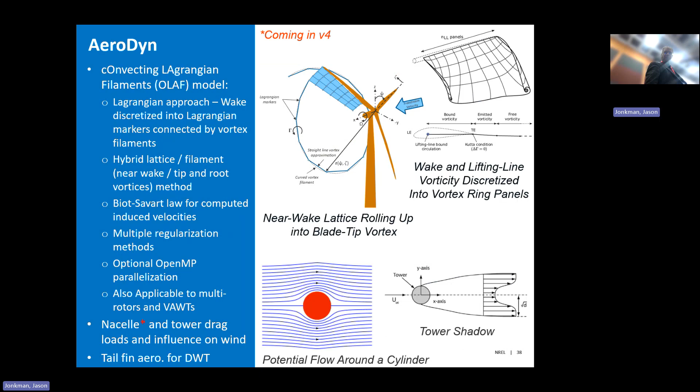And TurbSim also, both TurbSim and the Mann model, are stationary - we assume we're in some stationary stochastic process. So there's a given spectrum, a given profile, and I'll just solve it in that case. But if I want to go from 8 meters a second to 20 meters a second, that's two separate stationary events, so I'll run one at 8, one at 20. Likewise directions - if I want to run at 10 degrees or 30 degrees, I typically do that in two separate simulations, not one.

Okay, so that's how the IEC lays it out, and that's how we kind of follow here at OpenFAST - the turbulence is fixed direction, so if you want different directions you just run different simulations. But you can do direction changes in the uniform files.